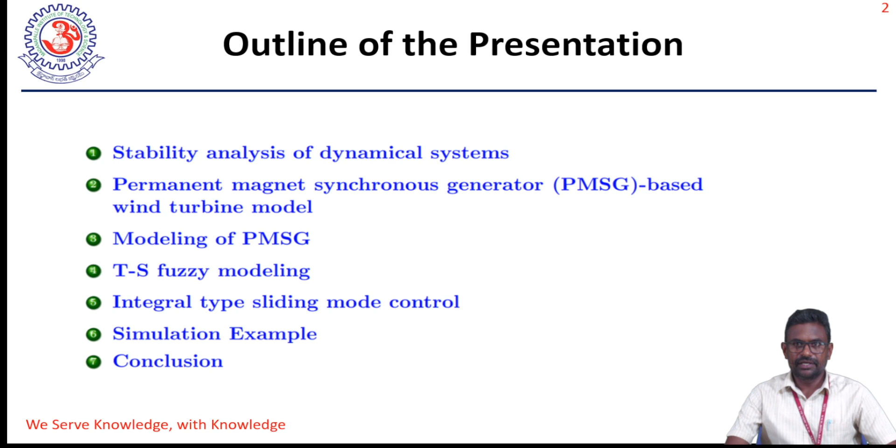The main significant result of this presentation can be summarized as follows. By introducing double orthogonal complement and Frobenius's theorem, the continuation condition of the fuzzy sliding surface is presented. The obtained sufficient conditions of passivity and passification criteria are characterized in terms of linear matrix inequalities, and by utilizing fuzzy Lyapunov functional passivity analysis, given the system matrices in the T-S fuzzy system and the matrices G and K in the fuzzy integral sliding manifold function, we determine under what criteria the fuzzy sliding mode dynamics is passive.

Then we'll see about sliding mode control law synthesis. By constructing an appropriate fuzzy integral sliding mode control, the reachability of the nonlinear sliding mode dynamics is ensured in the appearance of disturbance signal. Finally, a numerical example is provided to show the applicability of the concerned PMSG model.

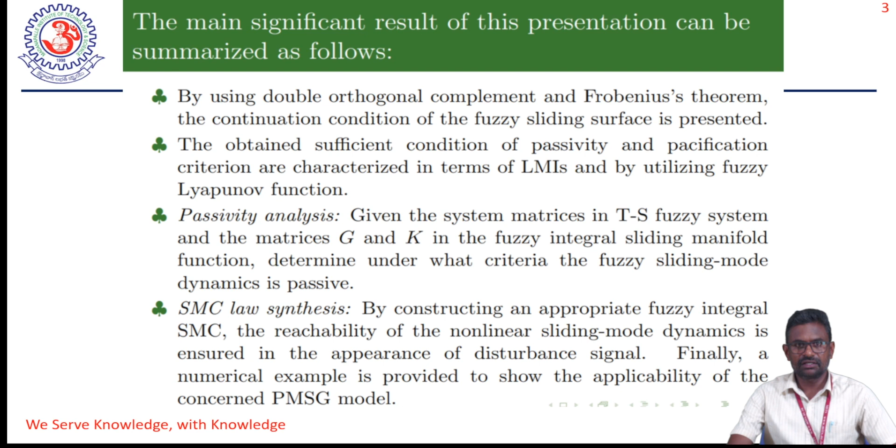There are two ways we can study the stability analysis of the dynamic system: the Lyapunov indirect method and the Lyapunov direct method. The Lyapunov indirect method stability analysis is based on linearization of the nonlinear system in the vicinity of the equilibrium state. It only gives local stability of the nonlinear system, so it has some disadvantages: if some eigenvalues are zero, then we cannot draw any conclusion about stability of the nonlinear system. It is valid only if the initial conditions are close to the equilibrium point.

So we use the Lyapunov direct method, the stability analysis which is based on energy functions. It answers stability of nonlinear systems without explicitly solving the dynamic equation, easily handles time-varying systems, derives delay dependent conditions for asymptotic stability, and determines the region of asymptotic stability or the domain of attraction of an equilibrium.

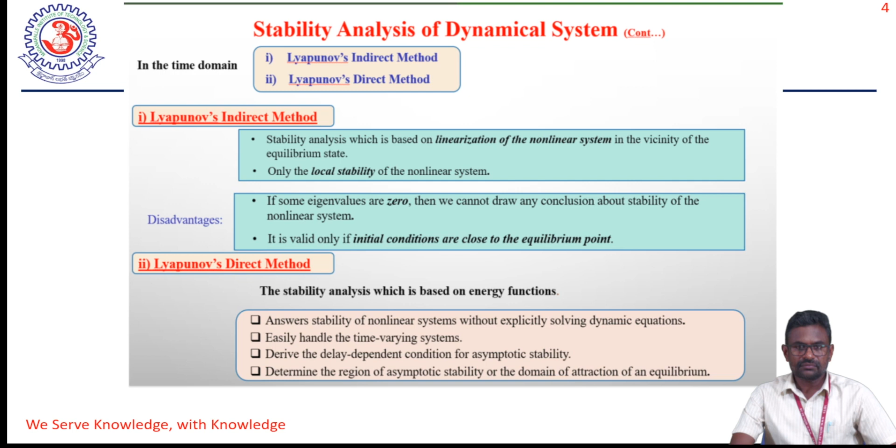For that, let us consider the following linear system: x dot of t equal to A into x of t. Here A is the system matrix and x of t has the equilibrium x equal to 0. For the system we choose the Lyapunov functional candidate V of x of t equal to x transpose of t, P x of t, where P greater than 0 is a symmetric matrix. Taking the time derivative of the above Lyapunov functional, V dot of t, we get equation number 2. Based on the Lyapunov equation, given any Q greater than 0, there exists a matrix P greater than 0 satisfying A transpose P plus PA plus Q equal to 0. Hence V dot of t becomes AP plus A transpose P, that is minus Q less than 0, that is V dot less than 0. We say that it is asymptotically stable.

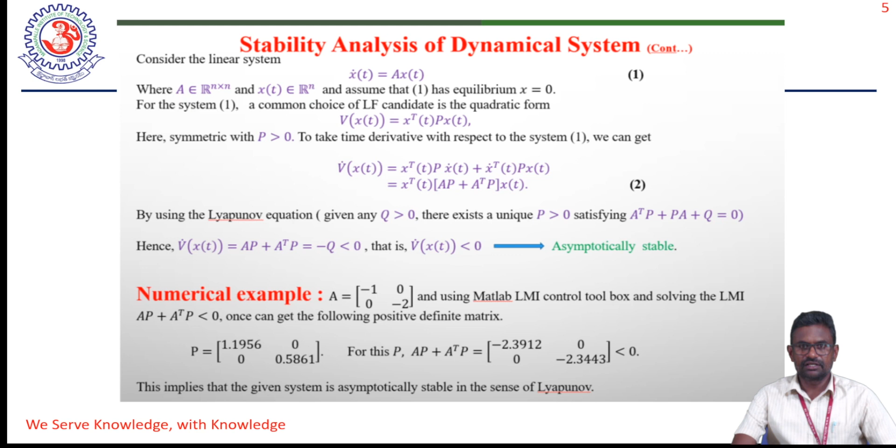So for the above theory, I gave a numerical example. Let us consider the A matrix. By using MATLAB LMI toolbox and solving the linear matrix inequality AP plus A transpose P less than 0, we get the following positive definite matrix P. For this, AP plus A transpose P we get less than 0. This implies that the given system is asymptotically stable in the sense of the Lyapunov function.

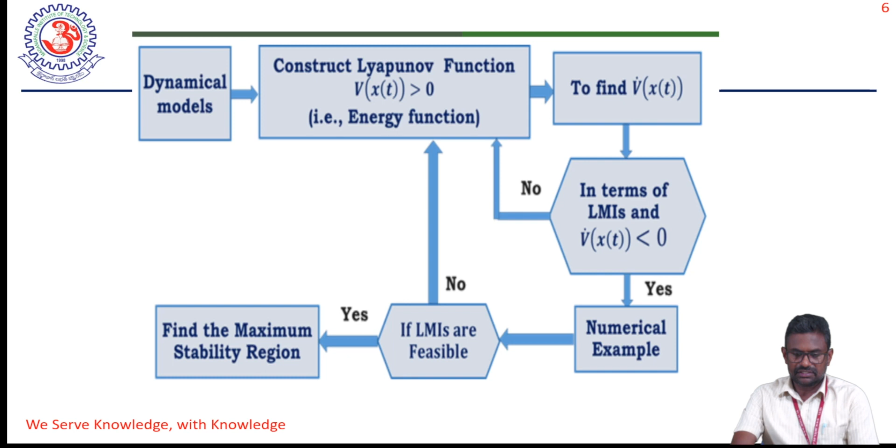This is the outline of my presentation. First we consider the dynamic model. To investigate the stability analysis of the dynamic models, we construct the Lyapunov functional V of x of t greater than 0. By using the ordinary derivative, we find the derivative of the Lyapunov function, V dot of t. If V dot of t is less than 0, we proceed to a numerical example. If it is greater than 0, we have to construct the Lyapunov functional again; this is a trial and error method. By using the numerical example, if the LMIs are feasible, we can find the maximum stability region. If the LMIs are infeasible, again we have to construct the Lyapunov function.

For that, I considered the nonlinear system x dot of t equal to f of x of t, u of t, and y of t equal to g of x of t, u of t. Here f and g denote Lipschitz functions. X of t and u of t denote the state and control input of the system, and y of t represents the output of the system.

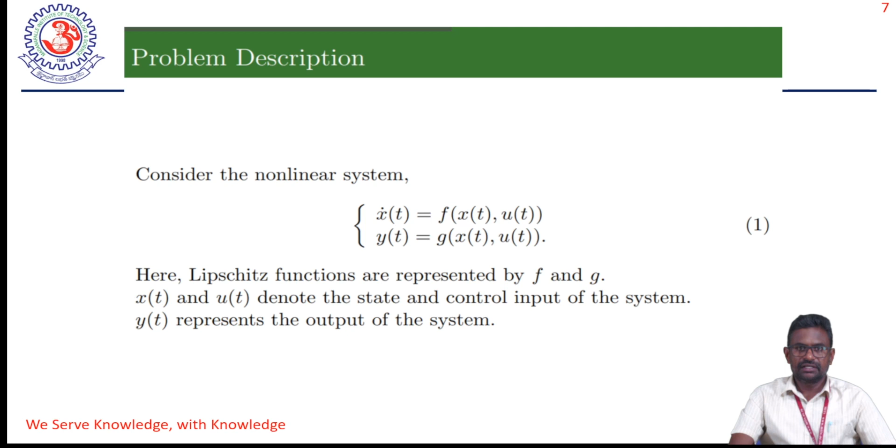For that, I have chosen the PMSG based wind turbine system. PMSG based wind energy conversion systems are brought into various applications because of their higher efficiency and lower maintenance cost compared to other generators such as DFIG. Therefore, it is essential to investigate the wind turbine system components that contain electric generators and controllers, which play an important role in the energy conversion system.

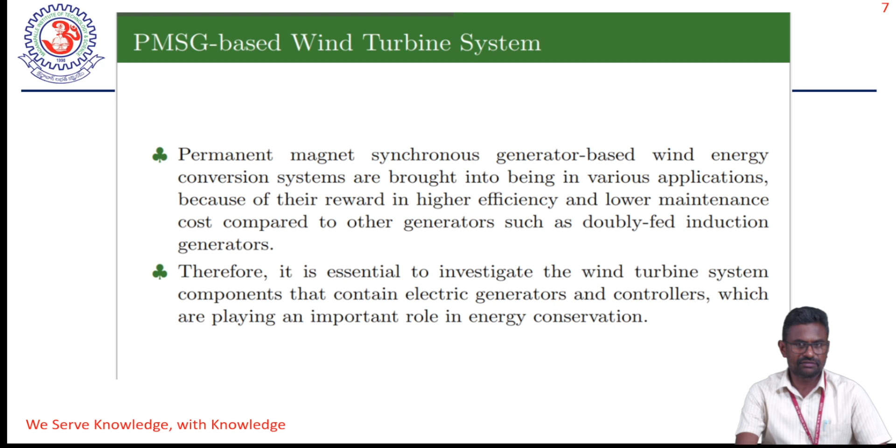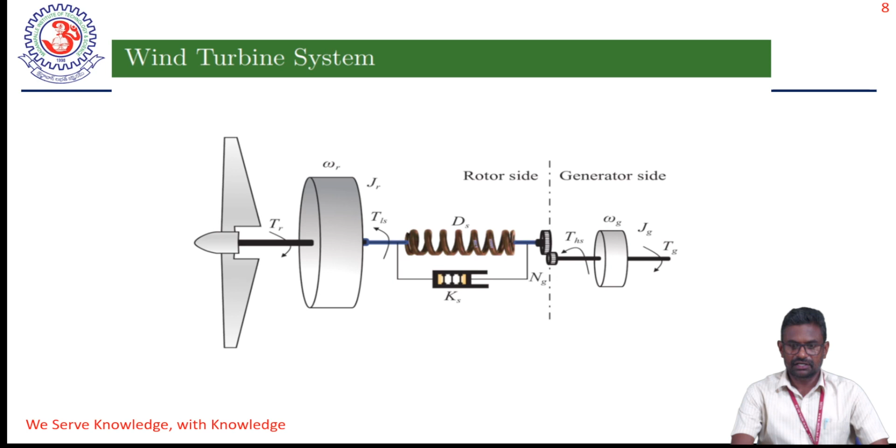So first let us see the wind turbine model construction. A wind turbine has rotor blades and generators. This linear kinetic energy has been converted into rotational kinetic energy by the rotor blades. Also, with the help of the generator, rotational kinetic energy has been transformed into electrical energy. To obtain the efficiency of this energy conversion, the concerning energy present in the wind needs to be obtained.

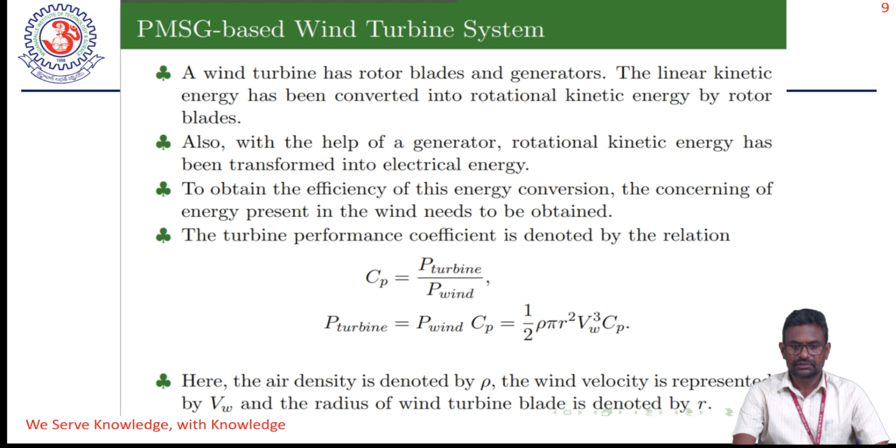The turbine performance coefficient is denoted by Cp and P turbine. Here, the air density is denoted by rho, and the wind velocity is represented by Vw, and the radius of the wind turbine blade is denoted by R. The tip speed ratio is represented by lambda. Here, Cp is the power coefficient, and the pitch angle is represented by beta. The mechanical torque of the wind turbine is denoted by Tw, and wind turbine speed is denoted by Wr. Torque coefficient is denoted by Cq respectively.

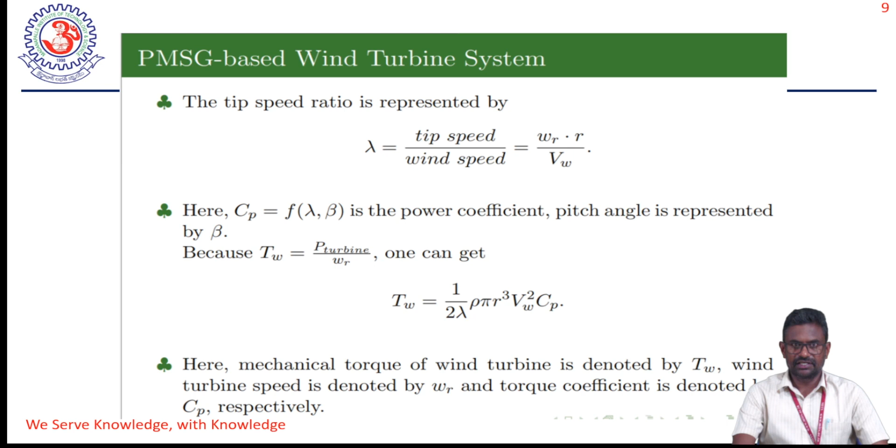Now let us see the modeling of the PMSG. The dynamic model of PMSG on the DQ axis is represented as follows, and its parameters are listed in the following table. Here LD and LQ are D and Q axis inductance. ID and IQ are the D axis current and Q axis current respectively. UD and UQ are control signals. Phi denotes magnetic flux of the permanent magnet. Beta denotes the friction coefficient of the mechanical system. Also, the electromagnetic torque is denoted by Te. Here, We equals Np times Wg, where Np denotes the number of pole pairs.

The scheme of the PMSG based wind energy conversion system is represented in the following.

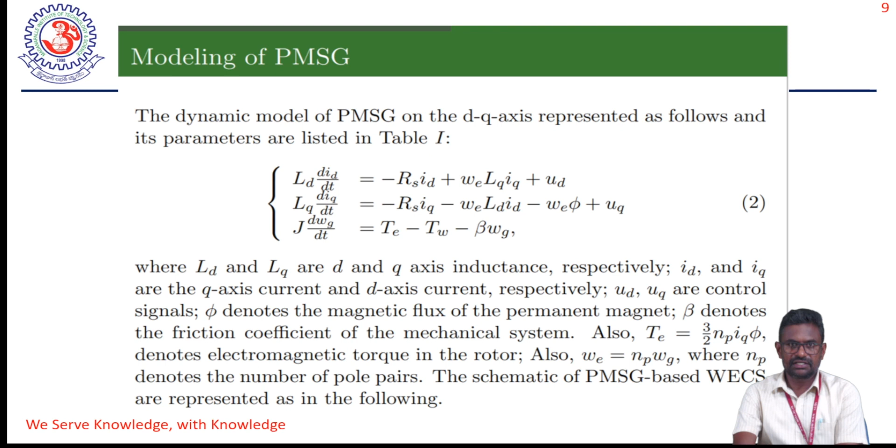These parameters are used to construct the wind turbine model. So the moment of inertia is denoted by J, rotor radius is denoted by capital R, air density is denoted by rho, magnetic flux linkage denoted by phi, stator inductance is denoted by LQ and LD, stator resistance denoted by Rs, number of poles denoted by Np, maximum power coefficient denoted by Cp max, and rotation speed of the generator is denoted by Wg.

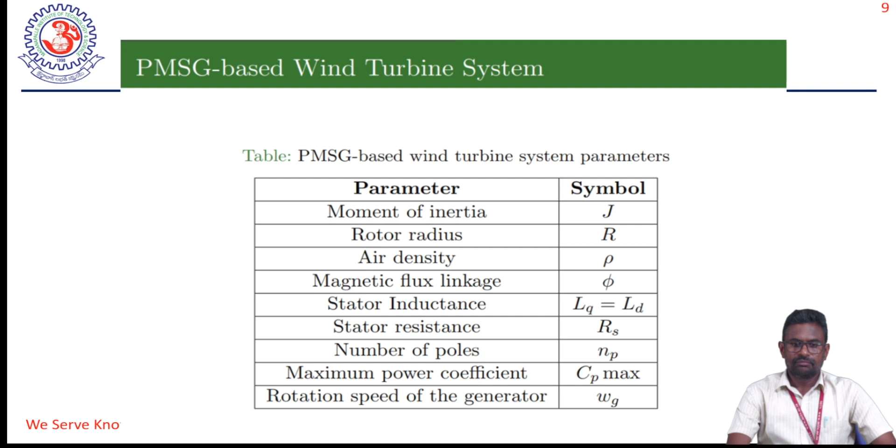By model transformation with the above parameters, the wind turbine system with the PMSG is denoted by the nonlinear model x dot of t equals A into x of t plus B into u of t. X of t is the state vector x1 of t, x2 of t, x3 of t, that is Wg, Iq, Id. The control input is denoted by u of t, that is Uq, Ud. Here the system matrices A and B are given below.

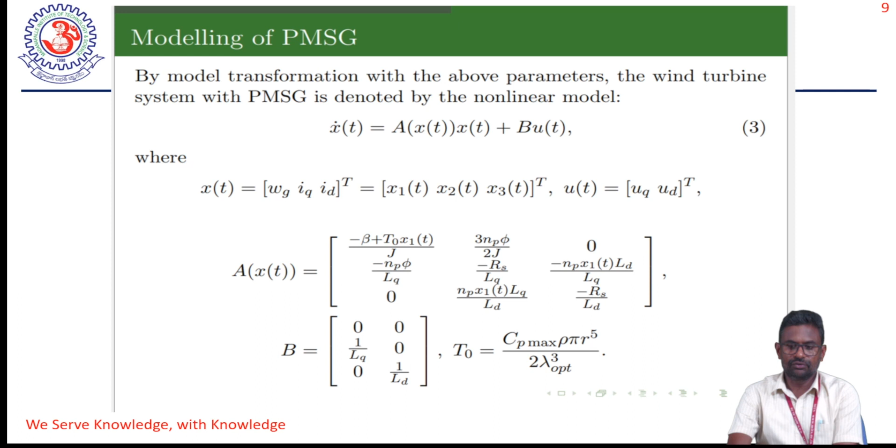Here it can be stated that the above system is a nonlinear model due to the product of the states. We know that the stabilization of the nonlinear model is very difficult and complex. So, the nonlinear PMSG based wind turbine model can be redesigned into corresponding linear submodels by utilizing a fuzzy membership function. In real life models, nonlinear disturbances play a major role in PMSG based wind turbine systems due to the complex environment. Therefore, we have taken the nonlinear function Fm and external disturbance W in the above system.

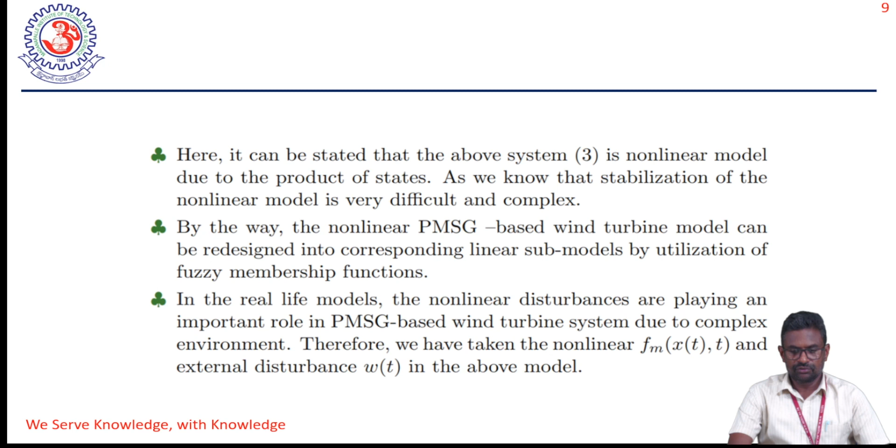Now, let us introduce TS fuzzy modeling. Let us consider the following nonlinear model. If theta i1 of t is eta i1 of t, and so on, theta ip of t is eta ip, then we get the following model. Here, eta i1, etc., eta ip are fuzzy sets.

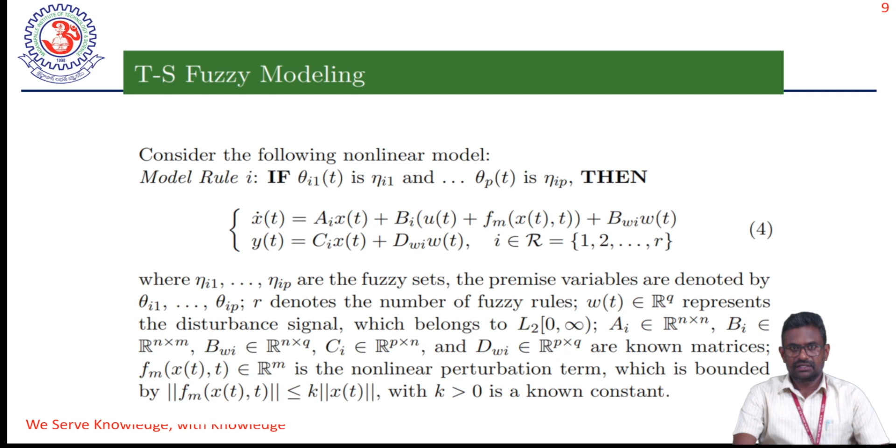The premise variables are denoted by theta i1, etc., theta ip, and r denotes the number of fuzzy rules. The disturbance signal is denoted by W of t, which belongs to L2 of 0, infinity. The system matrices Ai, Bi, Ci, Di are known matrices. Here, F is a nonlinear perturbation which is bounded by the following relation, where k greater than 0 is a known constant.

By applying the fuzzy rule, the nonlinear system is described as follows. Here we get the linear submodels. By using the membership function hi of theta, we get hi of theta greater than 0, and the summation of i from 1 to r, hi of theta equals 1, for all t greater than 0. Here mu ij theta of t is the grade of membership of theta j in mu j.

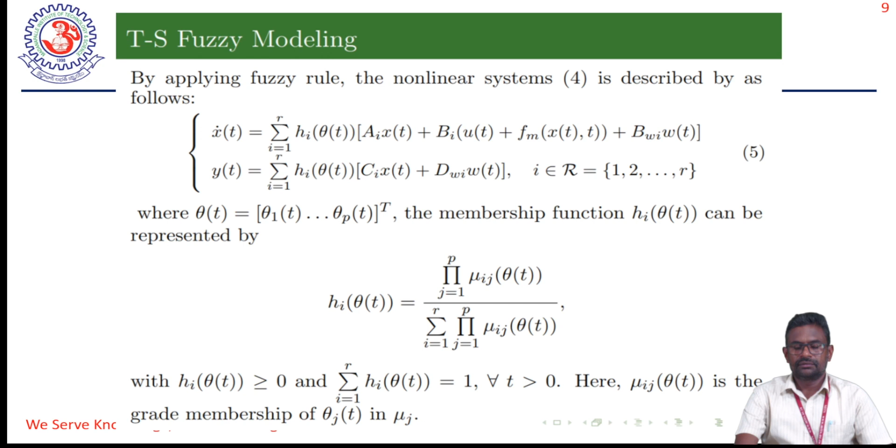Let us consider x1 of t belonging to x1 minimum, x1 maximum, denoted by capital M1 and capital M2, and the following equation: x1 of t equal to h1 times x1 of t M1 plus h2 times x2 of t M2.

h1 of t plus h2 x1 of t equal to 1, where h1 of x1 of t equal to M2 minus x1 of t divided by M2 minus M1, and h2 of x1 of t equal to 1 minus h1 of x1 of t.

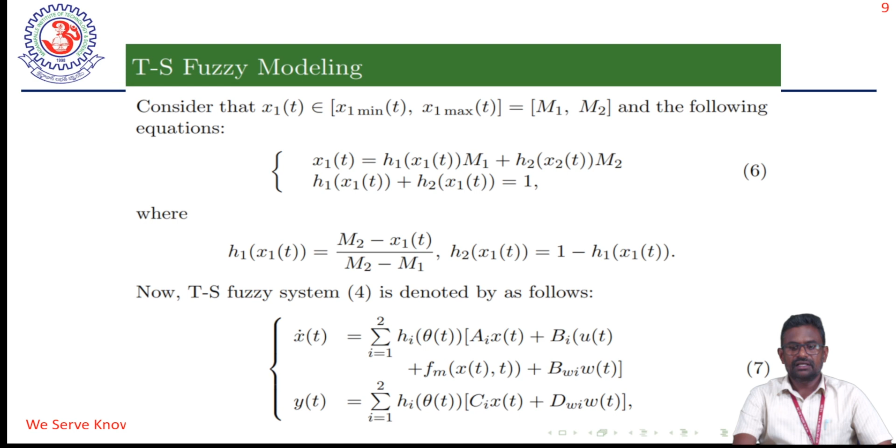Now, the TS fuzzy system is denoted as follows. Here, A1 and A2, B1 and B2 are the system matrices.

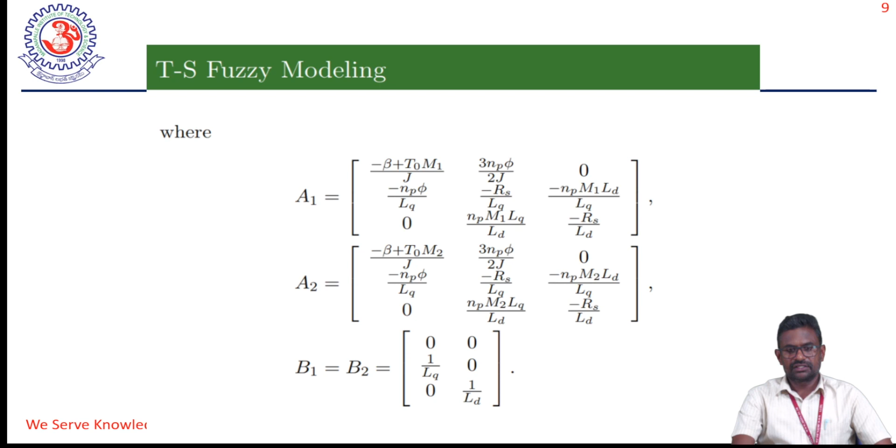To investigate the stability analysis of our considered system, let us introduce integral type sliding mode control. It gives a well organized way to control problems. It has been extensively utilized for both complex and practical models because of the properties of sliding mode control. It possesses a deprived robustness against mismatched disturbance during the reaching mode dynamics.

In general, sliding mode control design has two essential processes. First, to construct a sliding mode manifold as a function of the system states so that the system limited to the sliding surface has attractive properties such as stability. Secondly, to construct an appropriate relay type controller to make the model state trajectories reach the sliding switching manifold and preserve it there for subsequent time.

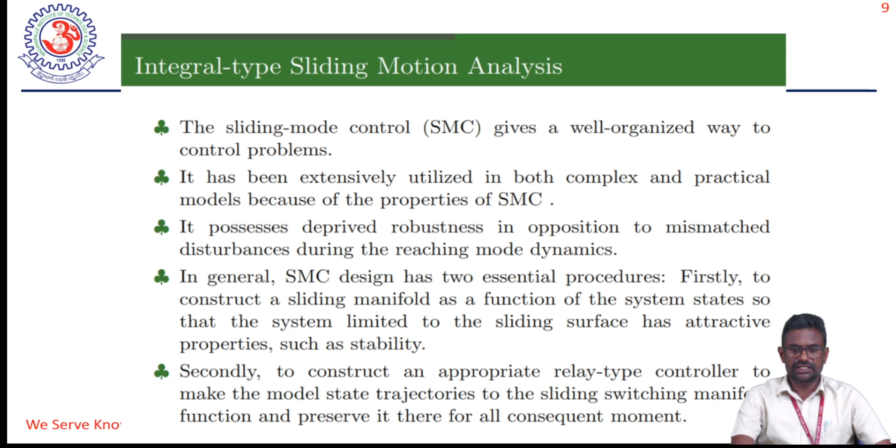Now, we propose a fuzzy sliding manifold as follows: S of t equal to the integral from 0 to t of g(x) dx minus the integral from 0 to t of g(x) summation i from 1 to r of hi(theta(x)) summation j from 1 to r of hj(theta(s)) [ai x(s) plus bi kj x(s)] ds, where the projection matrix is denoted by G(x) and the full rank matrix is denoted by N(x).

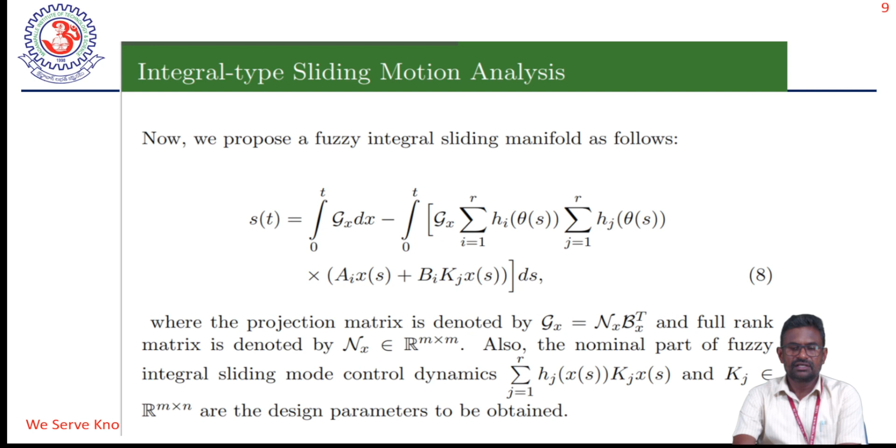Also, the nominal part of the fuzzy integral sliding mode control dynamics is summation j from 1 to r of hj(x(s)) Kj x(s), and kj are design parameters to be obtained.

The solution of x of t can be written as follows: x(t) minus x(0) equal to the integral from 0 to t of summation i from 1 to r of hi(theta(s)) [ai x(s) plus bi u(s) plus fm(x(s)) plus Bwi w(s)] ds.

The following can be obtained by using the above equations 8 and 9. We get equation number 10.

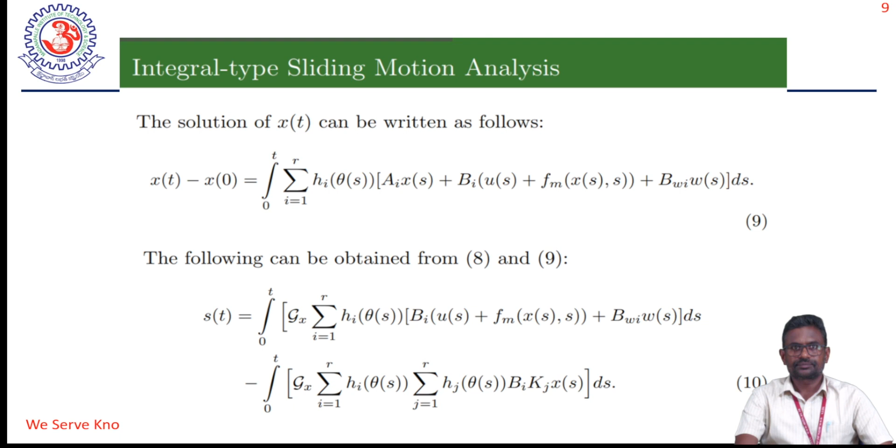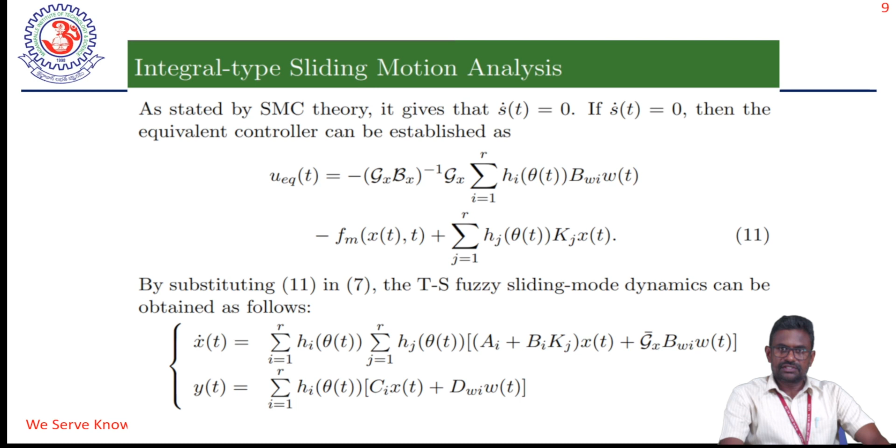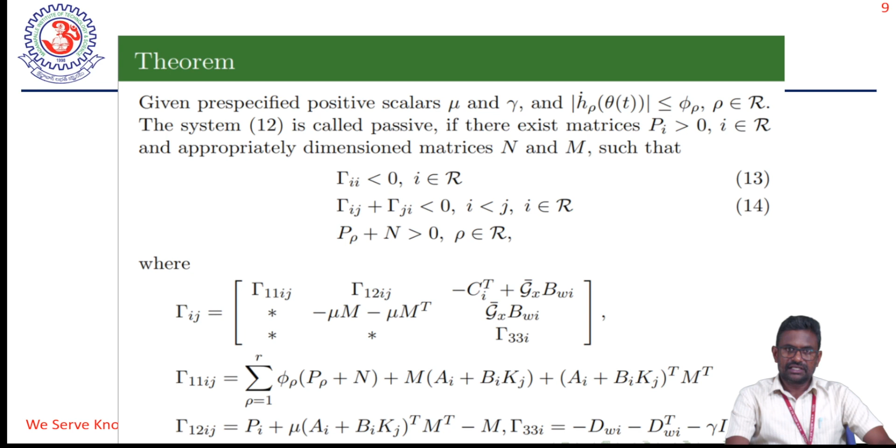Let us see the proof of the theorem. Based on the properties of the membership functions, for any matrix N equal to N transpose, the following equation is true. This plays a vital role in investigating the stability analysis of our considered system.

Here we choose the time dependent fuzzy Lyapunov function: v of t equal to summation i from 1 to r of hi(theta(t)) x transpose(t) Pi x(t).

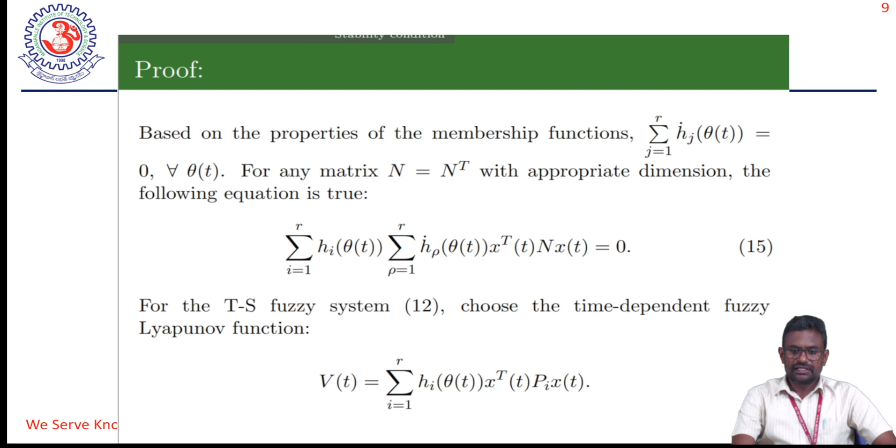Let us take the derivative of the Lyapunov function. We get equation number 16.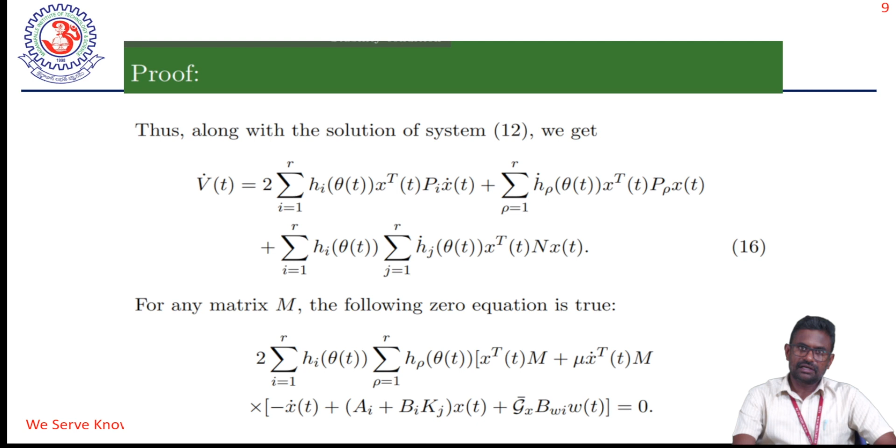For any matrix, let us consider the following zero equation. By using the zero matrix and the derivative of the Lyapunov function, we get: v dot of t minus psi(t) less than or equal to summation j from 1 to r of hi(theta(t)) zeta transpose(t) Gamma_ij zeta(t).

Here, psi of t denotes 2 omega transpose(t) y(t) plus gamma omega transpose(t) omega(t), and zeta of t denotes x transpose(t), x dot transpose(t), omega transpose(t).

By using the Schur complement lemma, we get: v dot of t minus psi(t) less than or equal to 0, less than or equal to 0. So we have derived the theoretical results.

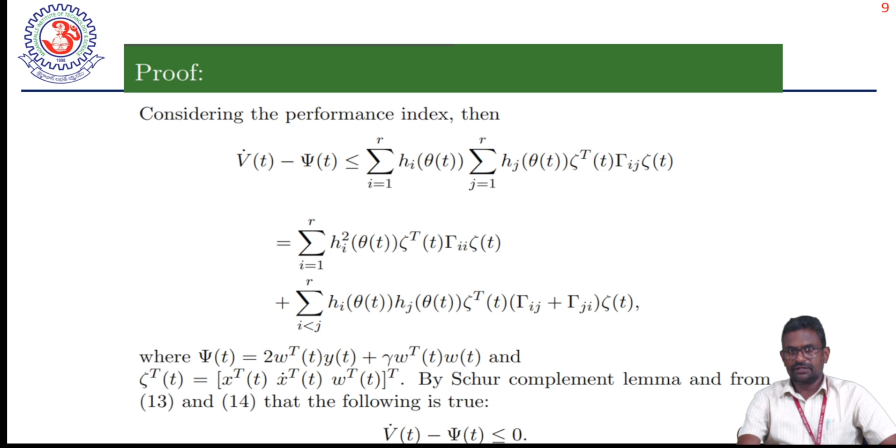We are going to verify, by using the following simulation example, whether our derived theoretical result is stable or not. For that, let us choose the following example.

Here the system matrices are assumed as C1, C2, B_omega1, B_omega2 equal to D1 and D2, and Fm. By solving linear matrix inequalities from the above theorem, using the above parameters, we get the following control gain matrices K1 and K2, which we have chosen here.

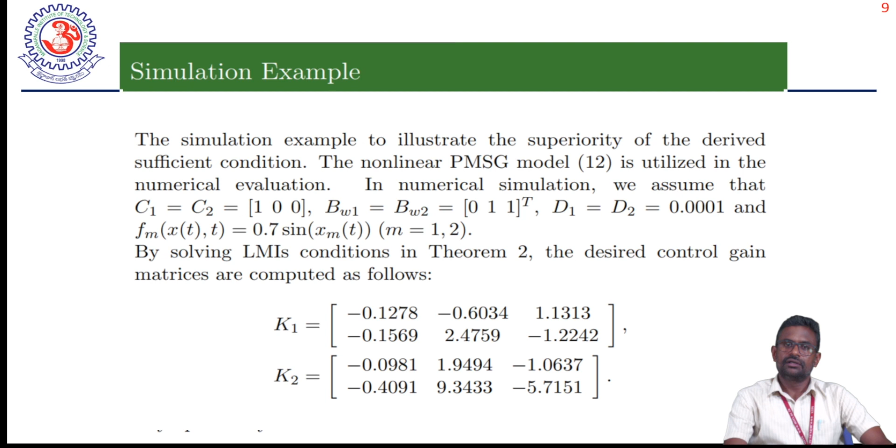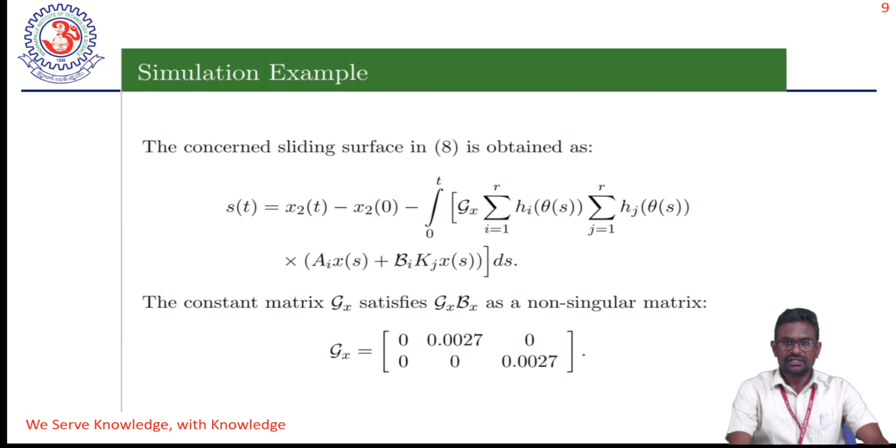The concerned sliding mode surface in equation number 8 is obtained as follows. Here, the constant matrix Gx satisfies that Gx Bx is a non-singular matrix. It plays a major role to get the control gain matrices. The system parameters we have taken from the existing literature: J, R, rho, phi, Le, LQ, LD, RS, NP, M1, M2.

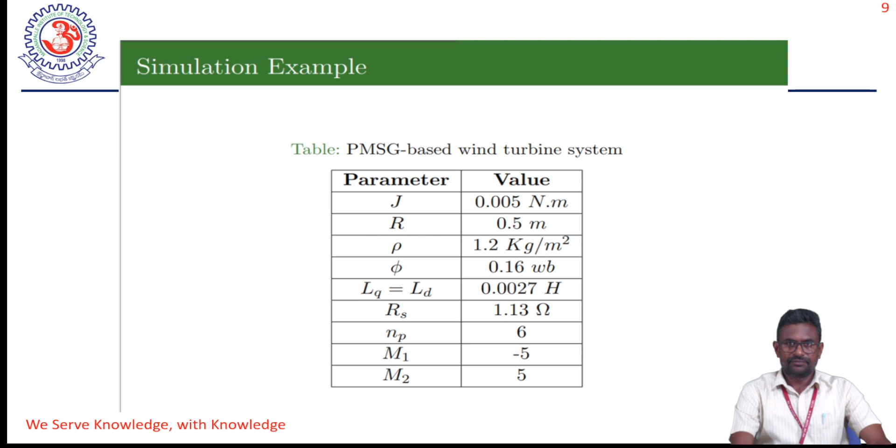Moreover, for the fuzzy sliding mode controller, we get the following relation U of t, which is denoted by equation number 21. Here, we have chosen rho of t equal to delta plus 0.2 into x of t, norm of Gx Bx plus norm of Gx Bw x plus norm of w of t. Here, the tuning parameter delta equal to 0.4 we have taken. Moreover, the disturbance signal we assumed is w of t equal to 0.9 divided by 1 plus t square.

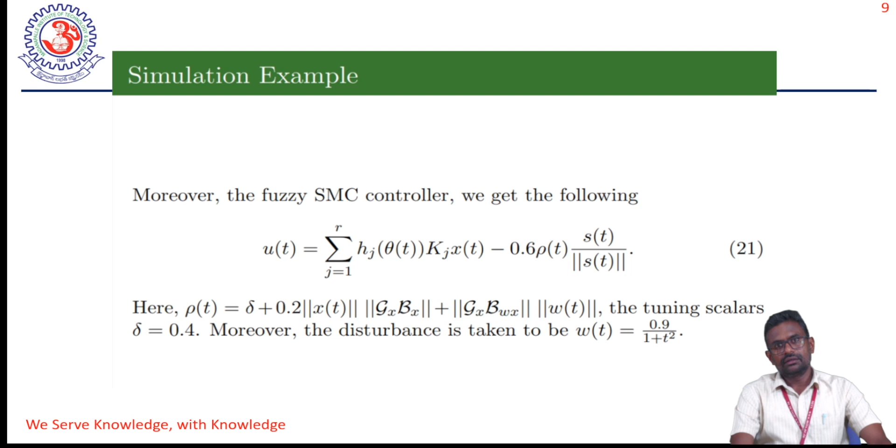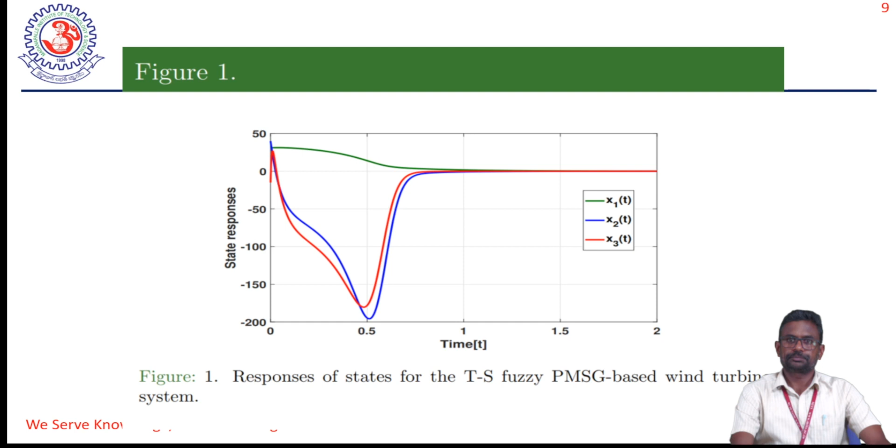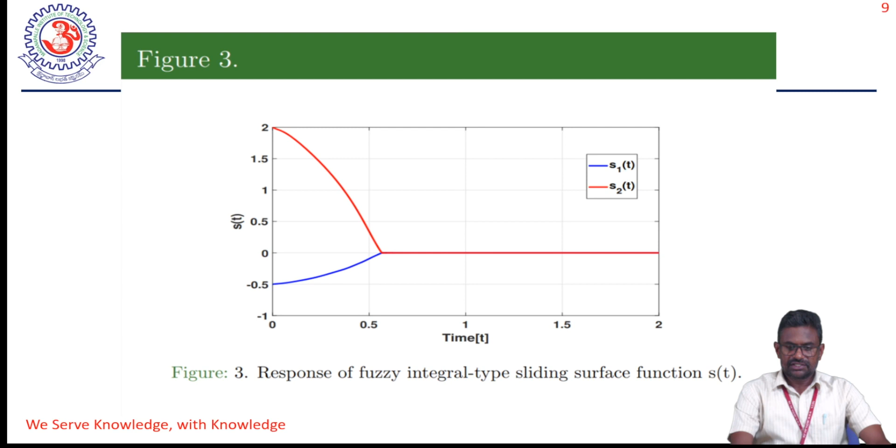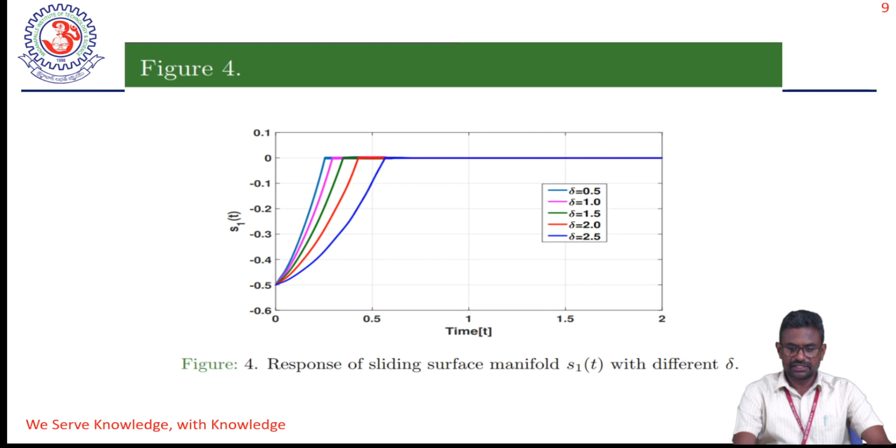Figure 4 indicates the response of the sliding surface manifold S1 of t with different delta. Look here, when delta equals 0.5, we get this trajectory. When delta equals 1, 1.5, 2.0, and 2.5, we get different trajectories. When delta values reduce, it reaches 0 quickly. So, this stability depends upon the stability which is included in the control signal. Similarly, we get the response of S1 of t with different deltas.

It can be clarified that the state response of the model shall start on the sliding surface manifold from the first time instant and can be driven onto any neighborhood near to 0 in a finite time, which is shown in figure 3. Moreover, figures 4 to 5 describe the comparison of the sliding surface manifold with different delta.

So, in order to describe the dynamic response of the system, the obtained solutions are plotted in figures 1 to 5 under the specified initial conditions for the states WG, IQ, ID, the fuzzy integral sliding surface S of t and control input U of t. Figures 1 to 2 depict the existence of the matched disturbance and the external disturbance. The state variable x of t with the fuzzy integral sliding mode control is asymptotically stable.

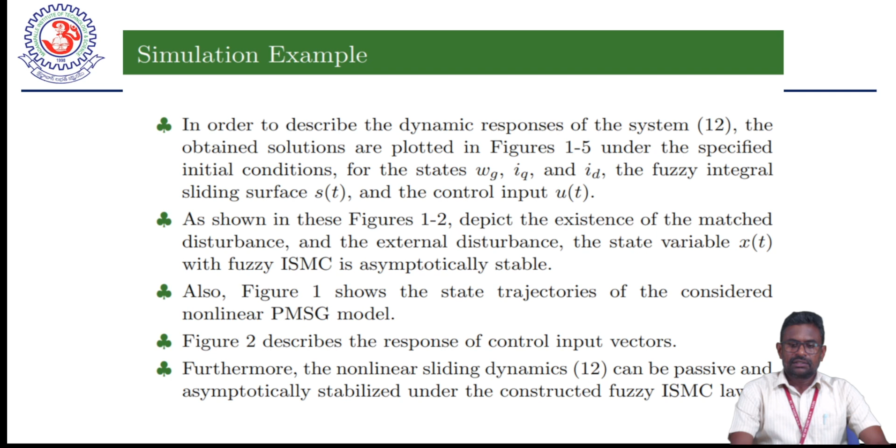So, it can be observed that the state response of the model shall start on the sliding surface manifold from the first time. So, it can be observed that the delta depends on the sliding surface function.

So, now let us conclude our presentation. Fuzzy integral sliding mode control for a PMSG based wind turbine system has been investigated by using the fuzzy Lyapunov approach, which includes the information of membership functions, by using orthogonal complement and projection theorems. The sliding manifold has been constructed. The sufficient conditions have been established for the concerned TS fuzzy sliding mode dynamics to ensure asymptotic stability.

Furthermore, a fuzzy integral sliding mode control has been synthesized to maintain the system trajectories in the pre-designed fuzzy sliding mode. Finally, a numerical example has been given to show the efficiency of the anticipated PMSG based wind turbine system. So based on our theory and numerical example, in future we can extend this work by using the nonlinear decoupling method and multi-simplex homogeneous polynomial approach.